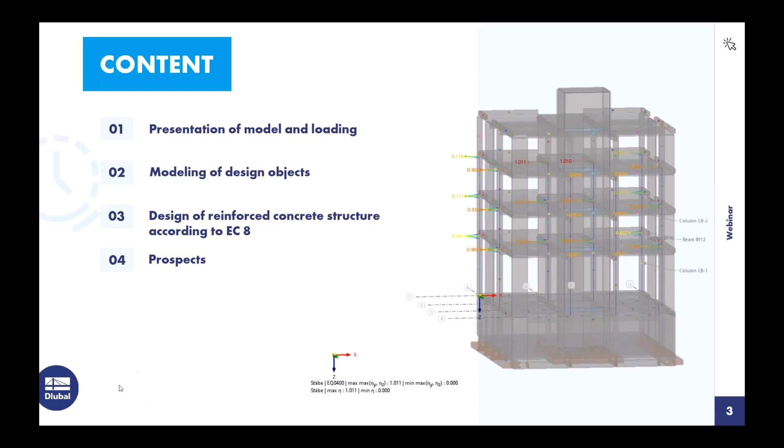We now go to the program. I open my model, I want to open this one. This is the building we will have a look at today. But before we do this, we open the base data.

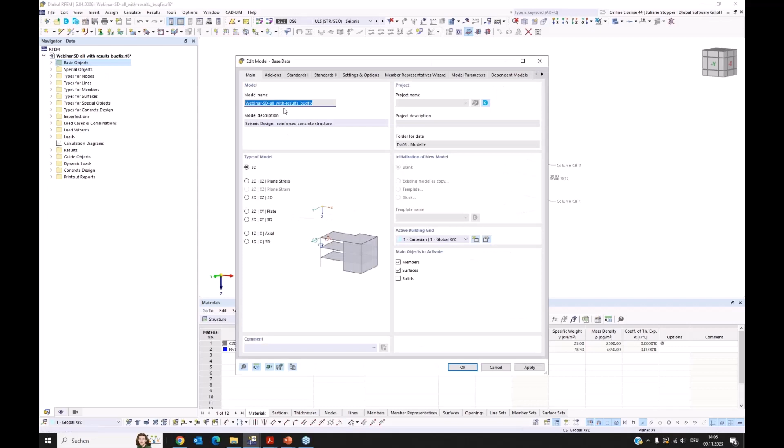And in the base data, you can see we have our register add-ons. In my model, I have the concrete design active, and for dynamic analysis I have the modal analysis and the response spectrum analysis active. As you know, in our finite element program, when you activate these add-ons, the needed input dialogues and program parts and output for these add-ons are integrated.

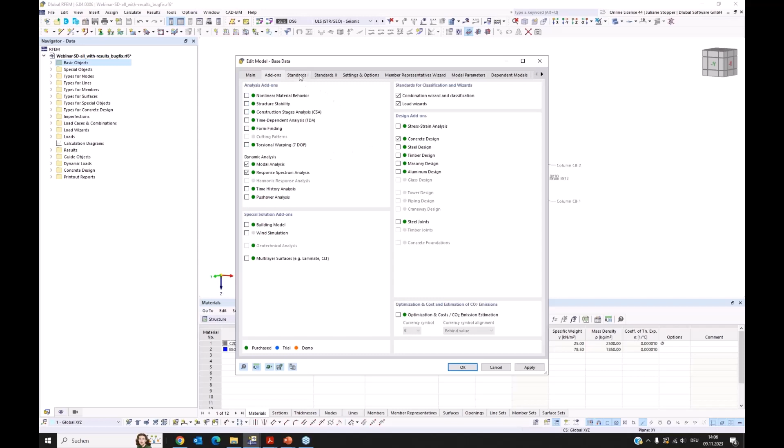So what we need to look at is the next register, the standards, because you have to tell the program according to which standard the design shall be done, and also for the dynamic analysis it is needed to be given. So today we will have the Eurocode as the standard we want to use, and I want to show we have here an overview about activated standards. If you select the concrete design here, you can see the standards activated in the concrete design, and you can see here that we have Eurocode 8 now integrated.

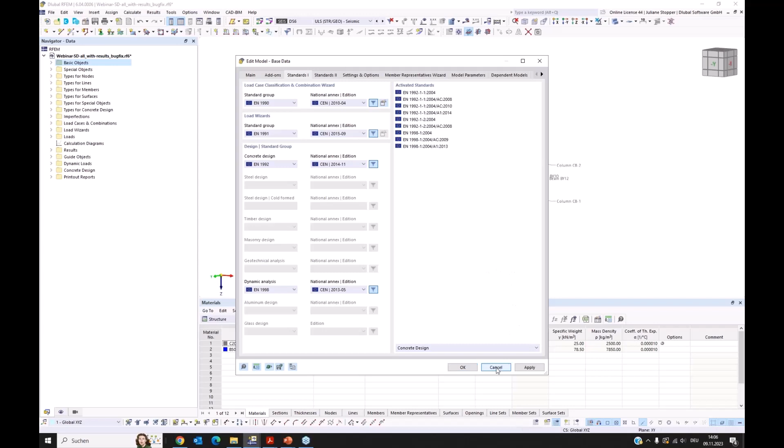Okay, this is enough, I think, for the base data. Nothing else that is new. Okay, then we can go back to the model and have a look at it a bit.

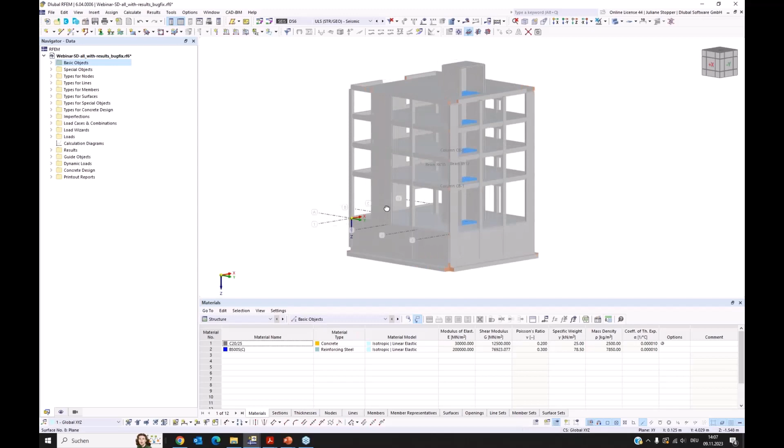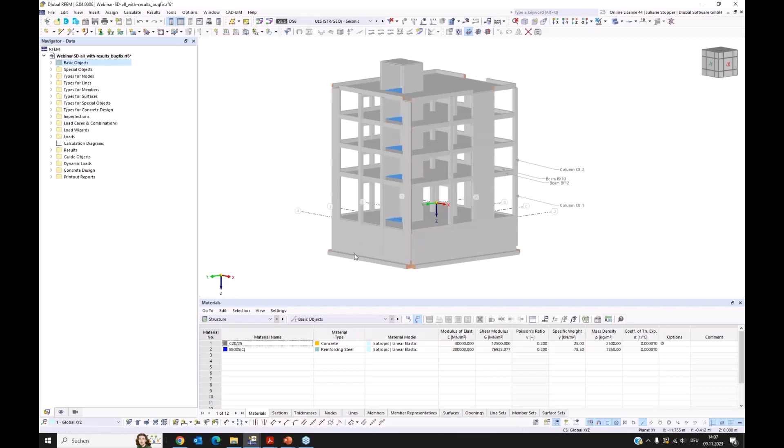So it's a reinforced concrete building that has 5 floors, and we have shear walls at every side, at least one. We also have this U-shaped concrete core here in the center of the building, and we have columns that go from the bottom of the building up to the top continuously, and they have the same cross section all over the height. And we have here beams placed between all vertical members.

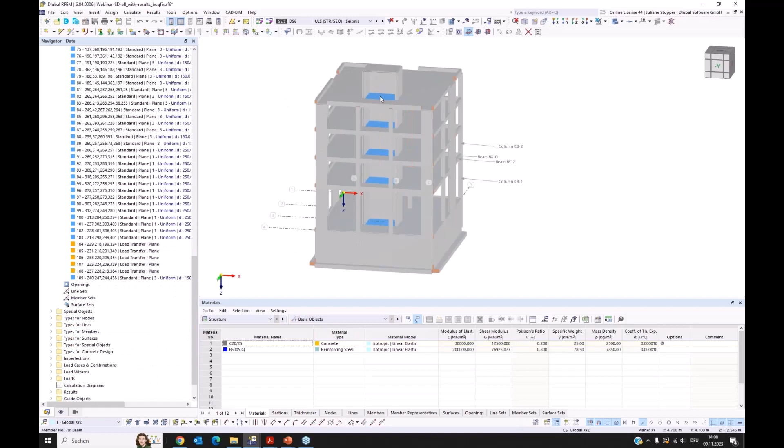Yeah, and you can see these blue surfaces I have in the building. They are just used to allow me, I forgot the name, that's why I go there, load transfer surfaces, for giving a simplified load for the staircase. Okay, I go back to the top and close this. Then we can, yeah, this is what I wanted to tell.

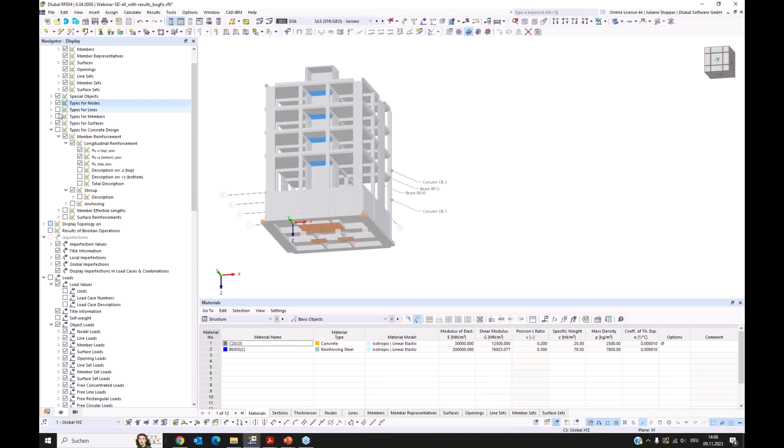Maybe I can show also the supports. I have nodal supports at the bottom and line supports. We can activate here, and there you can see that it's grounded on springs. Okay, then we can have a look at the loads.

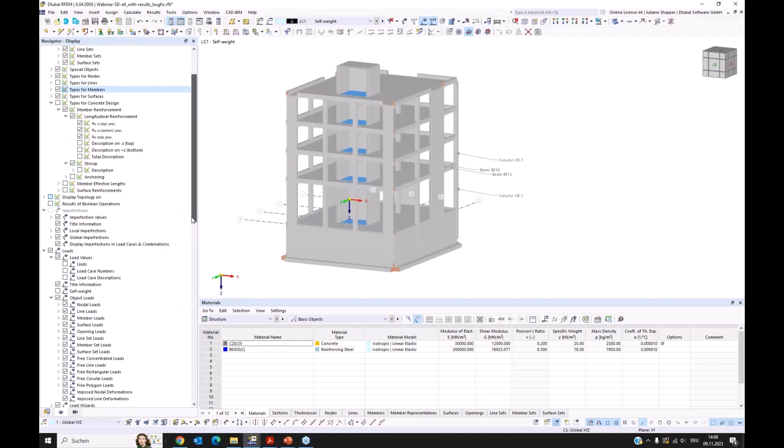We can activate them here, and I have in my model load case 1, which is for self-weight. And if you want to check what the program calculates from the cross sections and the materials weight, you can have a look at this and check these values, for example. Okay, I deactivate this. Then I have in my building a dead load placed, and also a live load.

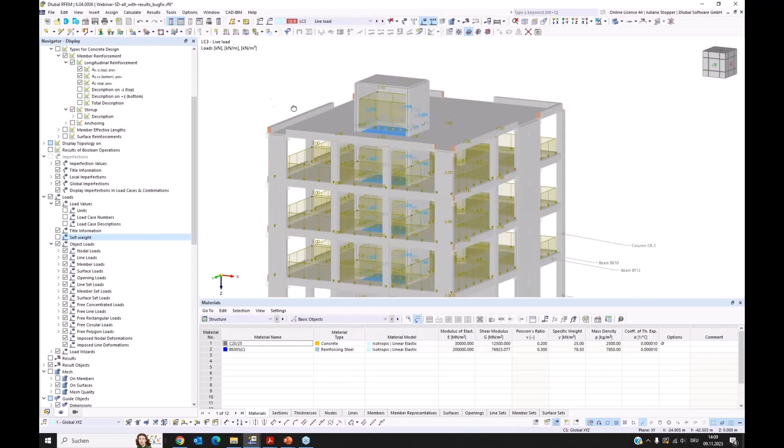Then I want to show the dynamic loads. Therefore, I go into the dialog where they are defined. We have here load cases and combinations, and I open this. Here we can see our load cases. So we had a look at the first 3 of them, and my 4th load case is a load case of the analysis type modal analysis. So it's selected modal analysis, and there we can check the modal analysis settings.

I will just show them. As I said, we have extra webinars where you can see in detail why which setting is needed or used. And we also provide trainings for this. So in my situation, I have 10 modes considered, and we consider the X and Y direction.

And I have in this register user-defined that I neglect masses from some structure parts that are placed in the support plane, let's say at the ground. Okay, then the modal analysis needs a load case or a load combination defined, from which it can import the masses. So I have this combination 8, from which the masses will be taken in my load case 4.

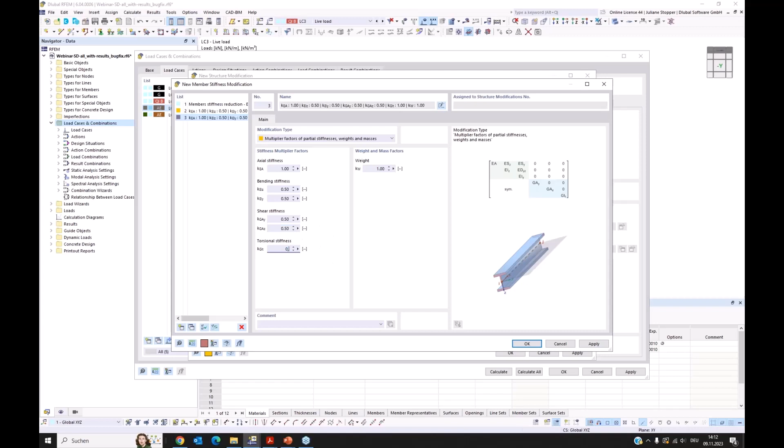Okay, and then you can assign it, and you have a stiffness modification here. This is what I now created. And you have to assign the members, of course. I only wanted to show this. I have this already prepared. I can remove this. We can have a look at this.

Here, like I said, you can define the stiffnesses and reduce them. I also renamed it, so it's easy to follow why I have this here. It's according to chapter 4.3.1 of Eurocode 8, clause 7. Okay, so this is how my modal analysis load case is defined.

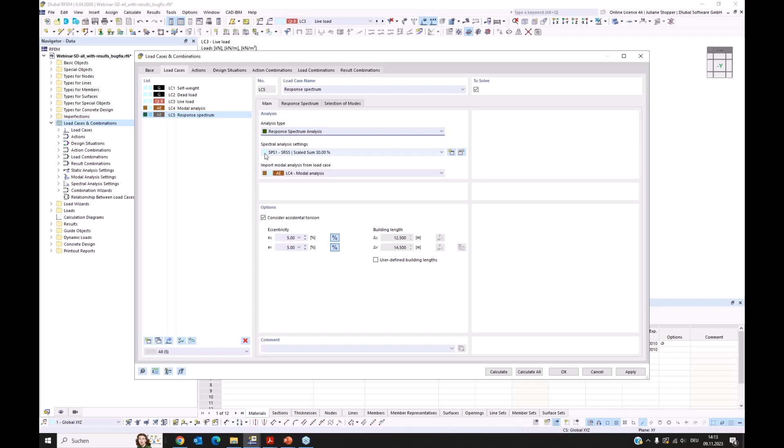Then I have my response spectrum. I have the analysis type response spectrum analysis set for this load case. And this load case needs a modal analysis load case, so I have my load case 4 assigned here. And I have spectral analysis settings for this case that I also only want to show. I have the SRSS combination rule, and I have the setting activated to save the results of all selected modes.

And the directions will be combined by the 30% rule. Yeah, these are the settings that I used in this model. And the accidental torsion is activated. Okay, then let's have a look at the response spectrum.

If you open this case the first time, it looks like this, and we have X and Y direction we want to consider, so you have to activate it, and then you can assign a spectrum. And I want to show you the spectrum I assigned. You have here the definition type, and it's also possible to have a user-defined spectrum or one generated from an accelerogram. But today we want to have the one according to standard.

Then you have to give the design parameters you have for your building, and we want to use spectrum type 1. We have ground type B, importance class 2, and this ground acceleration, and we have a behavior factor of 2. We will come back to this value later as it is relevant for our design. So we have in our response spectrum the behavior factor 2 assigned.

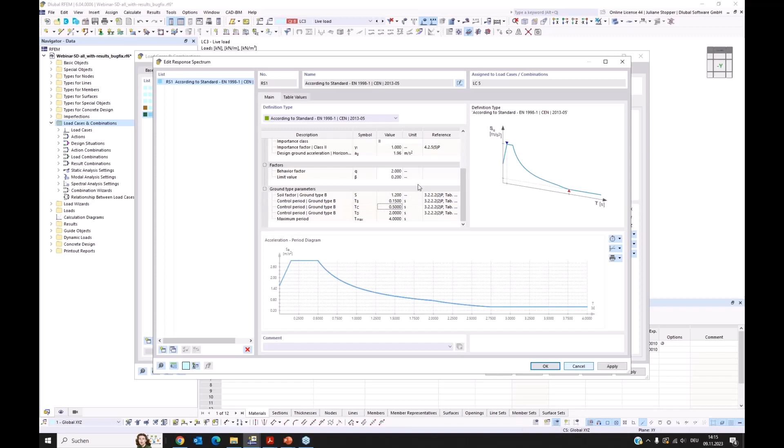And we can also see here these ground type parameters, and we have these periods, and this one, the TC, will also play a role later in the concrete design. Okay, then we can leave the spectrum. Yeah, that's what I wanted to show for these dynamic load cases. Then we can have a look at the further registers.

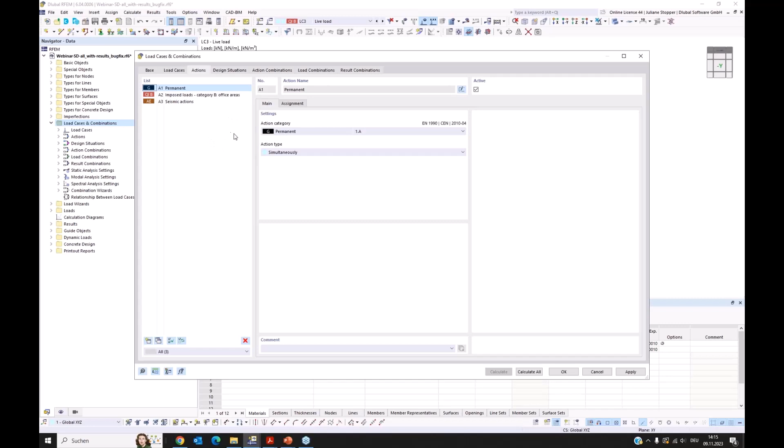These are the 3 action categories that are now modeled in this file, summarized. Then we can go to design situations. We have design situations 1, 2, and 4 that are known from the concrete design according to Eurocode 2. And we have this design situation 5. This is the design situation that was created for receiving a load combination where the mass for the modal analysis can be taken from. So we have here design situation type.

We can open this and we can see seismic mass combination type. Yeah, and if you want to see the rule of combination, you can click on this button. So this is the design situation type. This is the design situation that creates my load case for the modal analysis for the masses. For the concrete design, I need this design situation 6.

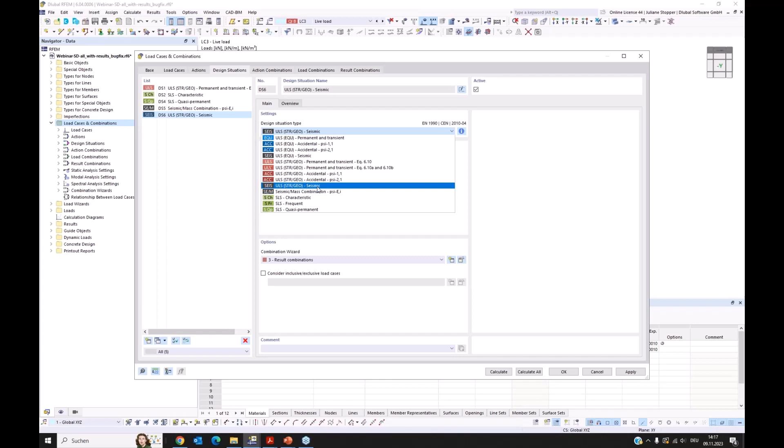We can have a look at the types again. There we have the seismic type, the ULS, STR, GEO seismic. This is the combination type according to Eurocode 8 for the seismic design according to Eurocode 8 for concrete members. Yeah, for other designs it could also be used, of course, but now we have here concrete design.

And we assign a combination wizard here. We have the response spectrum used, therefore we need here a result combination type. So this design situation generates result combinations for us. When we look at the previous design situations, they generate load combinations.

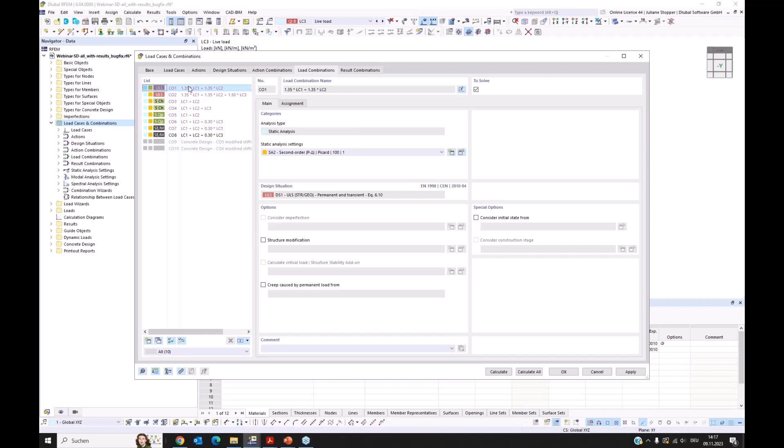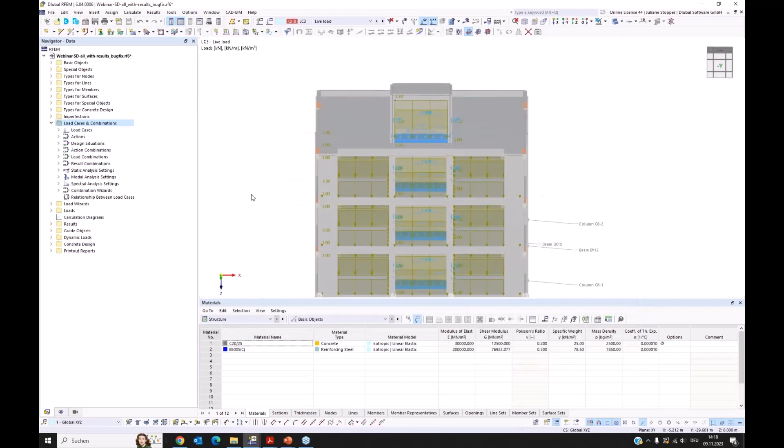Okay, then we can see our actions combined, and here are the load combinations that are generated from the first design situations, and we have here in the result combination the seismic result combination. Okay, that's all we need for the design from the loads. I will close this. I already have results in this model, so I don't save a setting or something. Okay, this is it from the model and from the loads.

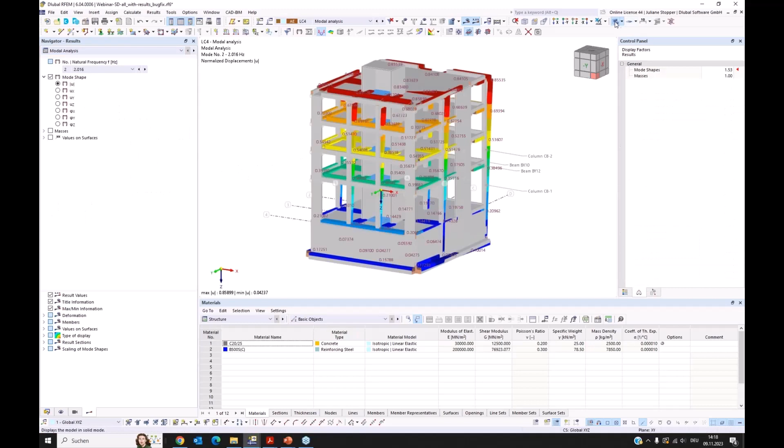I would like to shortly show you some results here. We have results when we go on the results button. We can shortly see the modal analysis. Yeah, here we can see the first mode shapes. We can see that the first shape is more in the Y direction and the second in this direction. No, this one is the Y direction, the first one was the X direction.

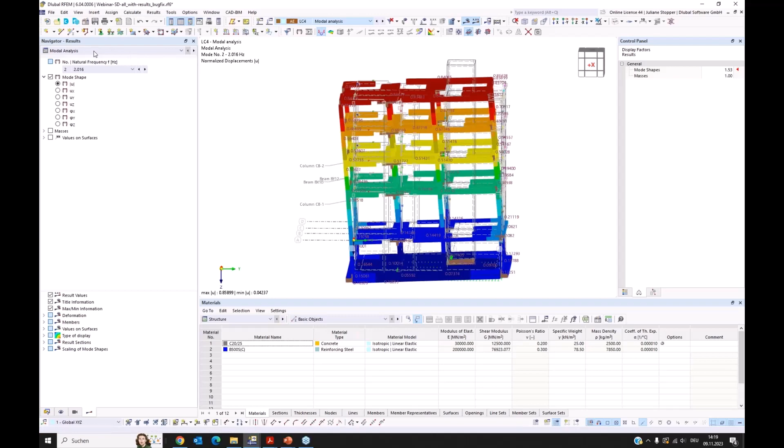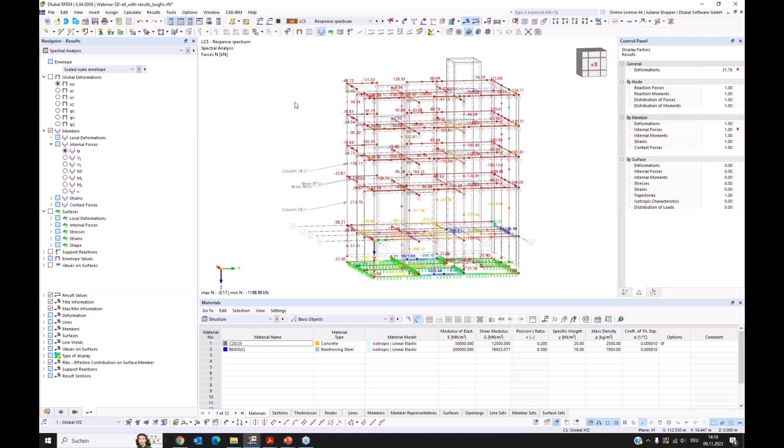So we have the modal analysis results, and we also have the response spectrum results. In the response spectrum, here spectral analysis, you can check the inner forces that come from the response spectrum in the members. These forces are then taken for the result combination and later go into the concrete design. Okay, so this is a short view on results. I will switch them off again and we go back to our navigator.

Now I want to come to the concrete design. My model already has reinforcement. I can also show this. Yeah, in the navigator display we have the option to display the reinforcement, and I will do this now just shortly for you.

Here we see. So this is all the members in my building that I have reinforced now. And if we look here, I can click on the column, for example, and do a right click, and you can also do a double click on the member. This works as well. And I want to show the reinforcement.

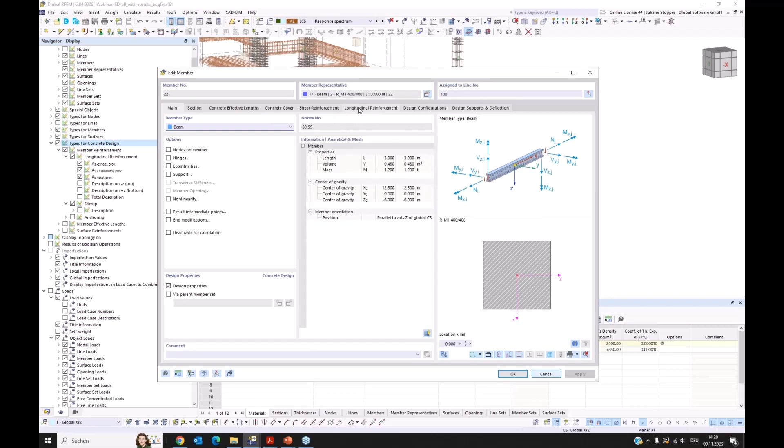In this column, I have uniformly surrounding longitudinal reinforcement. And I have here the shear reinforcement. And what we need for the seismic design is these cross ties. They are needed to have a more confined concrete core in order to receive a more ductile behavior of the members.

So you can activate it in the shear reinforcement, and you can modify it via clicking on the longitudinal bars. So if you have more longitudinal bars and you don't want cross ties between all of them, you can just click on the longitudinal bar and the cross tie will disappear or come back. Yeah, this is the thing about the cross ties.

Okay. Then, as we are already here, I want to show in a short excursus a feature we recently released. You always have the option in a member to see the reinforcement layout, and you can modify the way it is displayed here. For example, you can do a setting where you only see the longitudinal bars and no stirrups, or something. You can do as you like it or you need it.

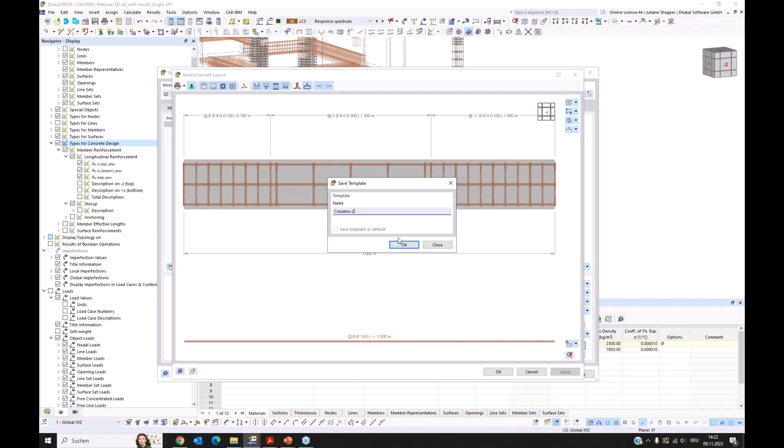And when you did this setting once for reinforcement layout for printing, you can save this now to a template. And this can then be used for more than one member. You can give the name, for example, I say columns, and maybe I say 2 because I already did this. Now I saved this setting. Now I have this template saved the way I like my reinforcement layout, and I will go back here.

And now if you say print graphics to printout report, I will deactivate this button. I don't want to print the model or the loads or the add-ons now. We have the multi-print activated, and I don't want these. I want to show you the graphic templates. These are templates that I have prepared before, and I now want to use my column reinforcement template. And you can use it for all members.

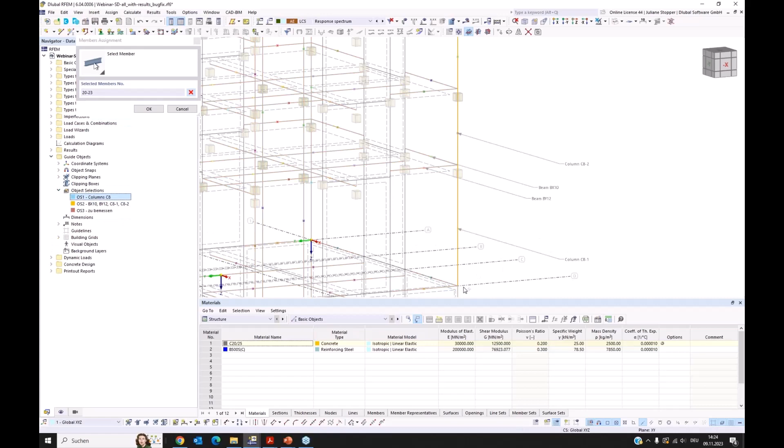Now 195 are detected, but I want to select them. You can use this mouse for picking the members you want to print with this layout. And I have an object selection prepared. I have now my columns C8. These are my columns in this position for the whole building I want to print with this reinforcement layout that I prepared before. I go back here, say okay, save and show, and then it is printed to the printout report, and after it is finished, it will show the result to us.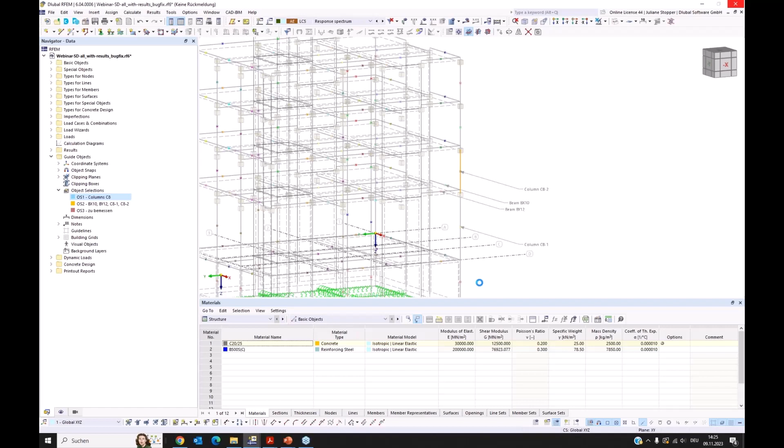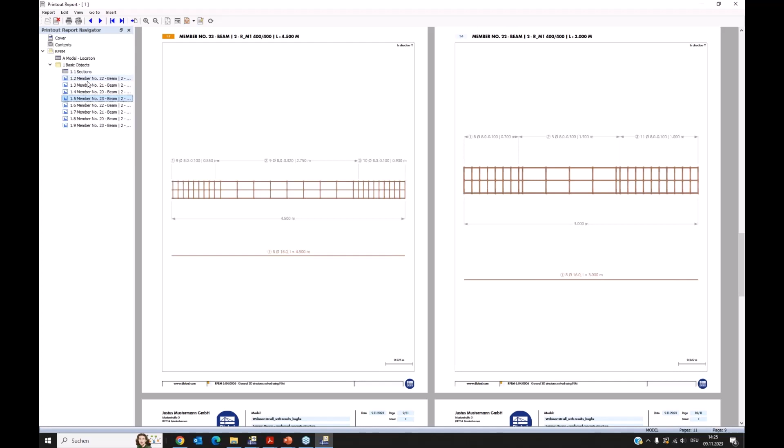Okay. I had a very short printout report prepared, so we can have a look at this. And now here you can see the members that are all printed with the same layout, and you have these graphics here. So with this template, you can easily print the reinforcement layout for a lot of members. Okay, enough for this. Let's go back to our seismic design.

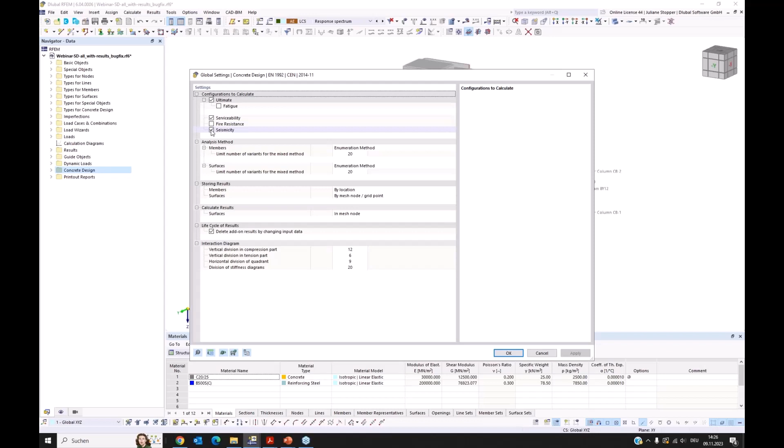I want to show the building again like this. Now I want to go to the further seismic settings. We have here the folder for concrete design, and if you do a right click on this, you can reach global settings for the concrete design. In this first field, you can select which configurations you want to have in your model. In my model, I have ultimate active, serviceability active, and seismicity active. So if this is activated, I have seismic configurations in my model, and at these we will have a look now.

Here you can see the seismic configurations, and I open them now. I collapse them. So here we have all the configurations you can do for controlling the seismic design. The first setting that we provide is the selection of the ductility class. We have the known low, medium and high ductility class. If you select the class, the provided input here changes.

So if we go to low ductility class, you can see that the configurations were reduced, because the low ductility class needs a design according to Eurocode 2 and has no further requirements for capacity design or ductility, but only a very small behavior factor is allowed. And it should be taken only for low seismic activity. Okay, so let's go back to medium ductility class so we can see more of our settings.

The second option is to define the structural system type. And if you have the case that you have different types in the different directions X and Y, you can also activate this check, and you can define the system type for both separately.

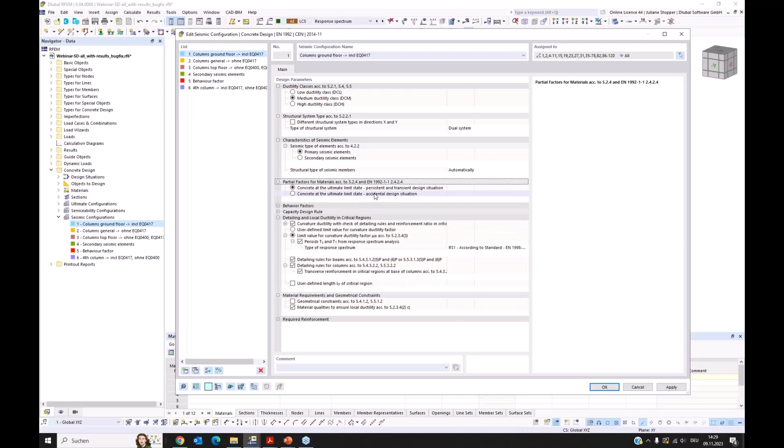Then you have the option to change the design situation to accidental design situation for the definition of the partial factors for materials. And then we can come, I collapse all again, to the behavior factors.

This is a check. If you activate this, you activate that you want your behavior factor to be checked. So the used behavior factor is checked whether it's below the upper limit for the factor. And you have the option to define manually the behavior factor that was used for receiving the loads you assign in your model.

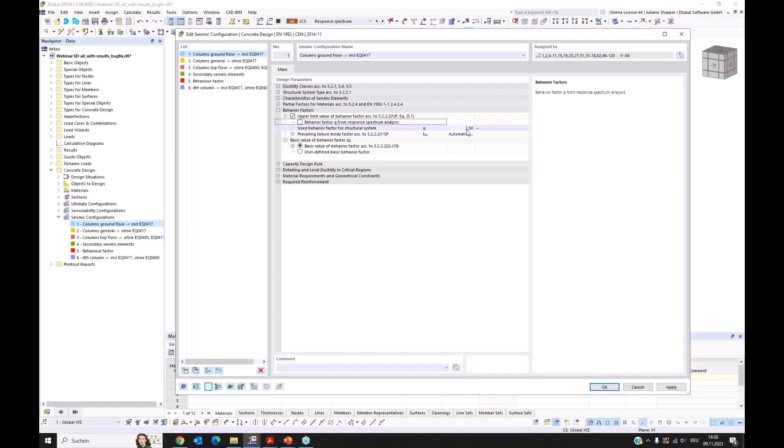Or, if you did the dynamic analysis in our program and you used the response spectrum, you have the option to take this value over from there. So I do it. We saw our response spectrum and we saw that we have the behavior factor, which is 1.5 for this situation or this model, and I want it to be taken in my check.

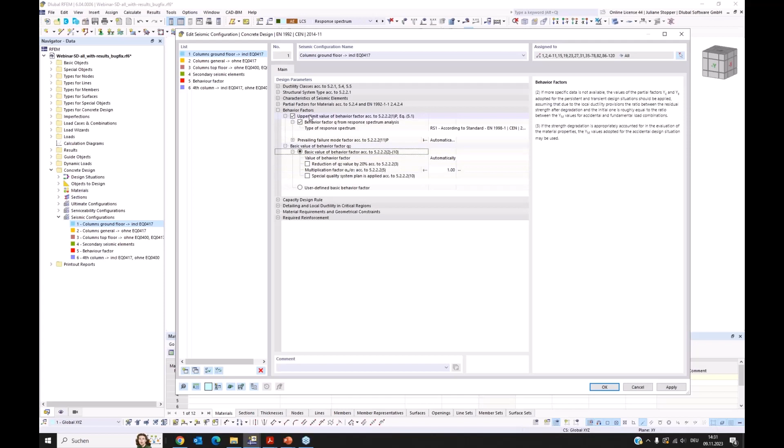Then you have here settings that you can do for the basic value of behavior factor that goes into the upper limit value. If you have this special quality system plan, for example, according to this clause of the standard or something, this has to be looked at with time.

The basic value of the behavior factor can be found automatically dependent on the system type and the ductility class you assigned, or you can also define it. You can set it directly here, select it by yourself, or you can also give a user-defined basic value.

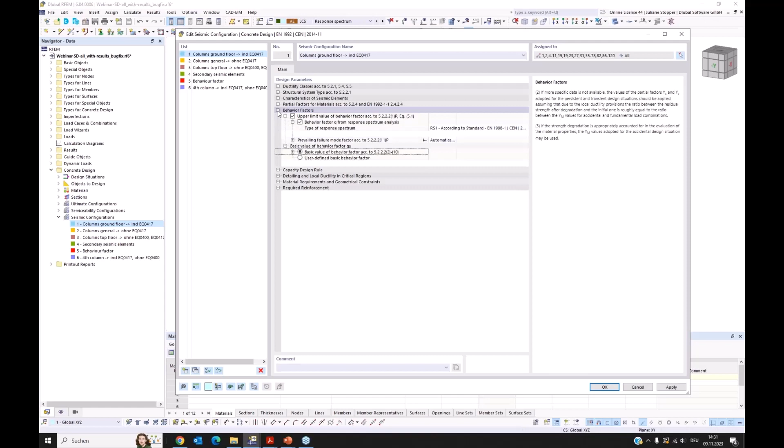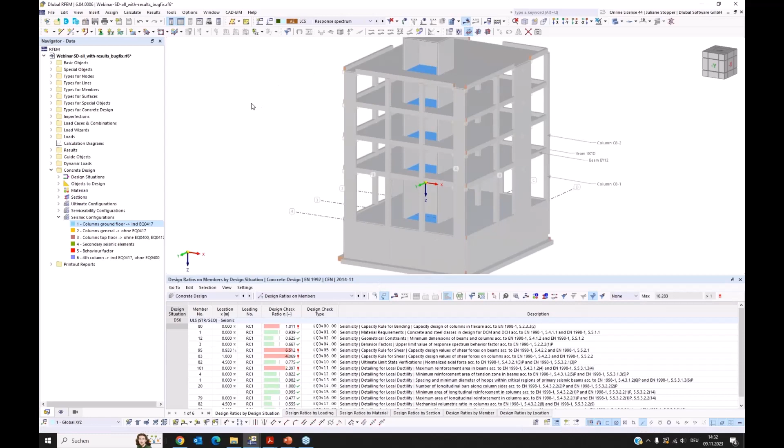We can have a look at this check shortly. As I said, I already have results in my model. If you look here at the concrete design, we see all the design checks that are done, and the check about the behavior factor is our check 0404. And we can have a look at this.

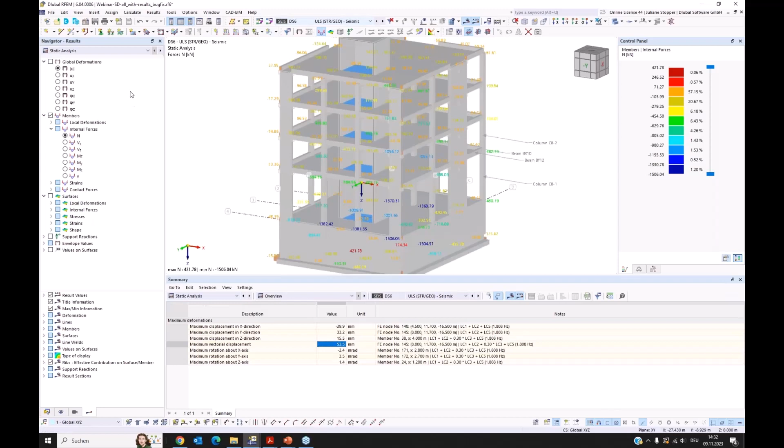If you double click on the design check type, no, I want to go back to concrete design. If you double click on the design check, you get into the design check details, and we shortly have a look at it for the behavior factor. And here you can very well follow what the program does.

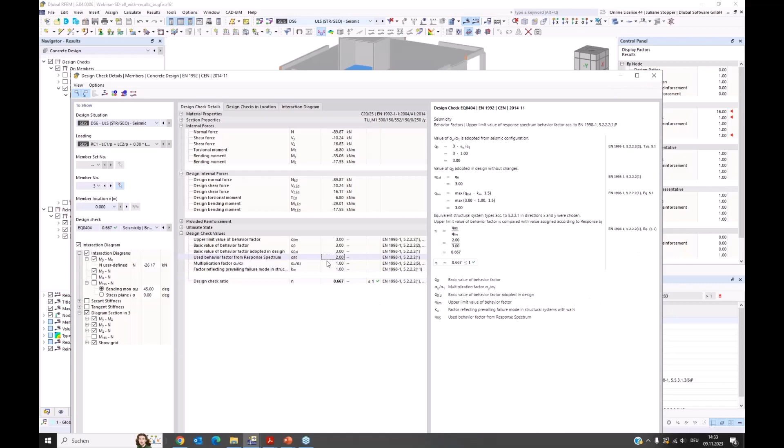So we have our basic behavior factor and the factors that you defined in advance, and the limit value is found. Then it is compared with the used behavior factor for the calculation of the loads, and we see that it's taken from the response spectrum, and we have the 2 here. So this works well, that we take over from the dynamic loads these parameters that we need for the design as well.

Okay, I can also reach the configurations from the table here. We have the input data here, and here also, as you can see, our configurations and the seismic configurations. So I can also open them from here. And we are back in the configurations. I can collapse them, and now we come to the capacity design rule.

With the capacity design rule, you can control the failure mechanism of the structure, and for this 2 main checks are required. And for this, I will go to the presentation shortly.

What we need is to fulfill equation 4.29 of Eurocode 8, which is about the ratio between the sums of the design values of the moment resistances of beams, here with B, and columns. This rule is the strong column, weak beam concept. So we require that the moment resistances of the columns are stronger than the moment resistances of the beams at a joint. So we have to check this equation for all joints, for all nodes.

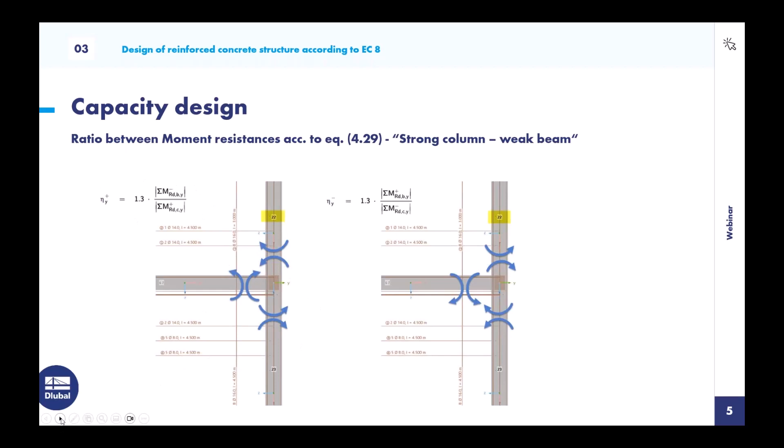This is the one check, and the second check is the capacity design shear check. In the situation when you reach moments that equal the moment resistances, you can calculate the related shear force in the member. And for beams, you also have to assign the quasi-permanent load. And this shear situation you have to check, because you don't want an earlier failure because of shear, which is also brittle.

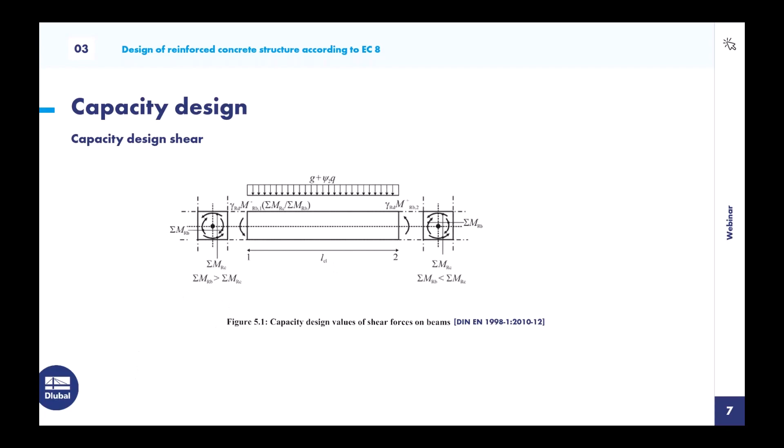So you have to check this situation when you have the moment resistances reached at the member ends and the quasi-permanent load. This shear force has to be checked as well. So let's go to the configurations again.

In the first checkbox, we activate the strong column weak beam rule. We also can see here the equation 4.29. And in the second check, we activate the shear force, shear check for capacity. Then you also have the option to define overstrength factors for beams and columns. And we have here the detailing rules and the ductility checks.

We have here at the top the curvature ductility checks, which are provided indirectly via the requirements for detailing rules. So by fulfilling these detailing rules, the curvature ductility check can be done. And we have one checkbox for the beams and one for the columns. And for these checks, also the limit value for the curvature ductility factor is needed.

And here again, you have the option to take the values Tc and T1 from the dynamic load, from the response spectrum that you assigned. Again, you can assign it here. If you don't want this, you can assign these values manually, or even assign a limit value for the curvature ductility factor manually. Okay, but we have this situation. I have the periods taken over from there.

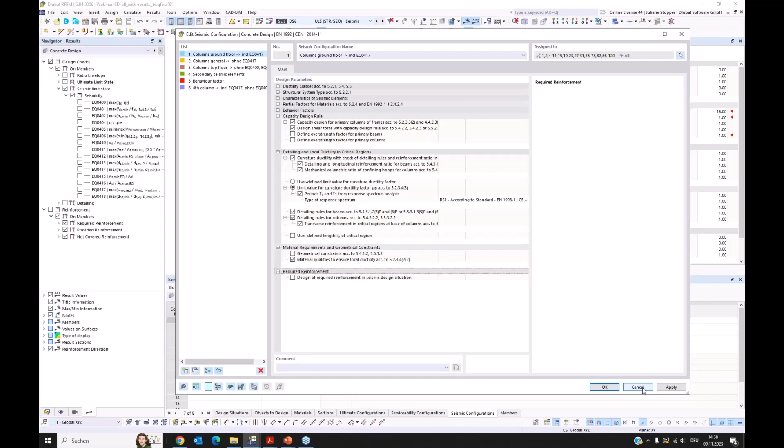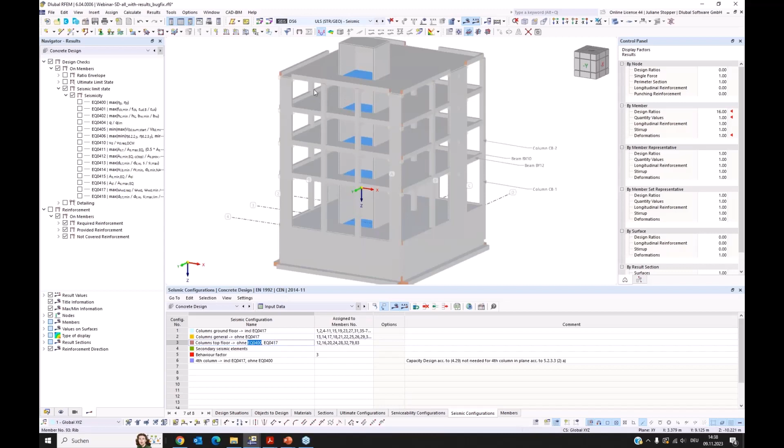Now we will have a look at some checks. As you saw, we provide the option that you can select quite detailed which checks shall be done or shall not be done, and this allows you to make specific configurations for your situation. For example, I have for the top floor another configuration which doesn't do the strong column weak beam check, as I don't need it for this floor. And you can also have a setting for the secondary members, and you can modify it quite functionally for your situation. Okay, and now we have a look at results.

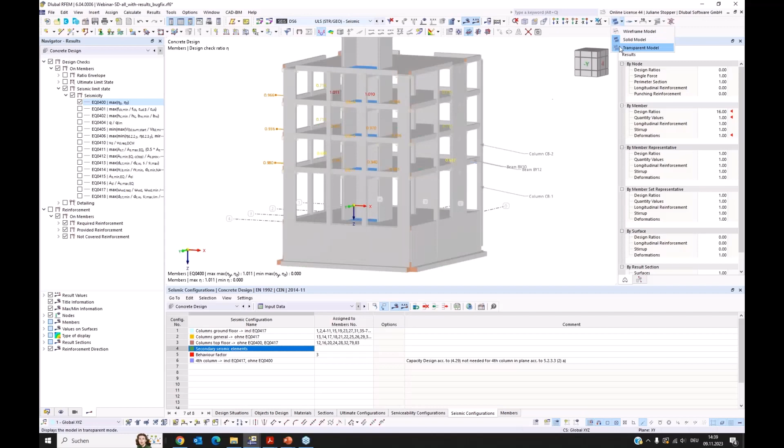I will at first activate this check. It's the EQ 400, and this is the capacity rule, the strong column weak beam check. If we go here to wireframe model, or maybe the transparent model. No, let's go to wireframe. You can see that in all these nodes where columns and beams come together, this check is done. And I want to now have a look at this with you in detail.

Therefore, I use these members that I have given names here, as it is easier to work with not all of them at the same time. I have prepared guide objects here. I have an object selection which contains these members, and I can click on here and then set my visibility so that only these are displayed.

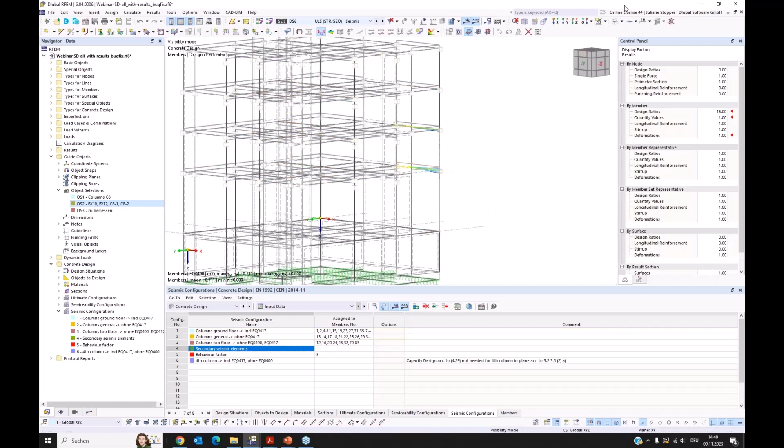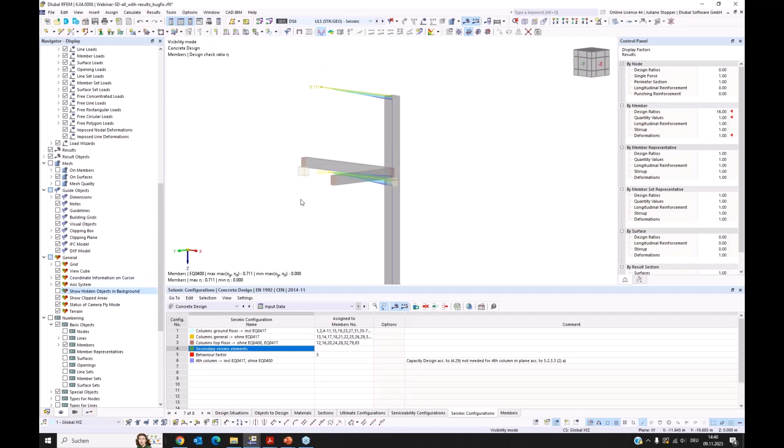And if I go on this view, I see my selected members, and I have a kind of shadow display for the rest, and I can also switch this off. Sometimes it's good as an orientation, but now I don't want to see this. I want to have a look at these members. Okay, we have the results graphically, and we have them also here in the table.

I can go on design ratios on members, and here, if I select them also, I have my EQ 400, the strong column weak beam rule. And we come to the design check details. Here you can see that the program does the check. The strong column weak beam rules we check in the column members. So I can open numbers for them.

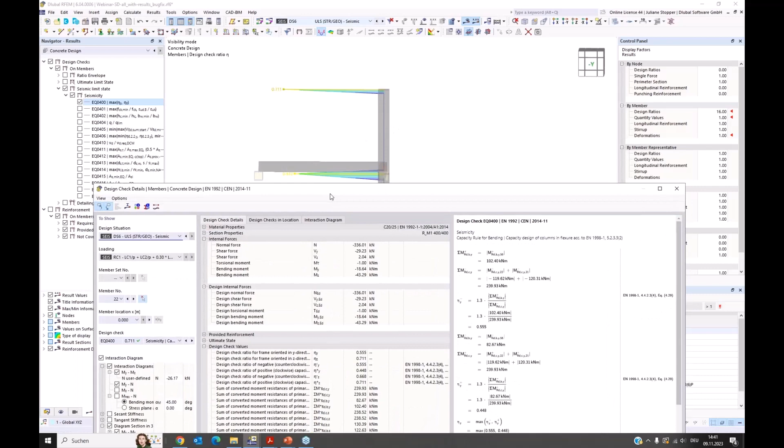I have here my column number 22, and in this member at the end and at the beginning, the strong column weak beam rule is checked. So if we look here, now I'm at member location 3. I want to also see the local axis. So position 3 in this member is this node here, and I want to have a look at this. So I again go to location 3.

And as we can see, we have the Y direction. So all these indices are dependent on the column. So I have the moment resistances around the y-axis, around local y-axis of the column, that are checked now at first.

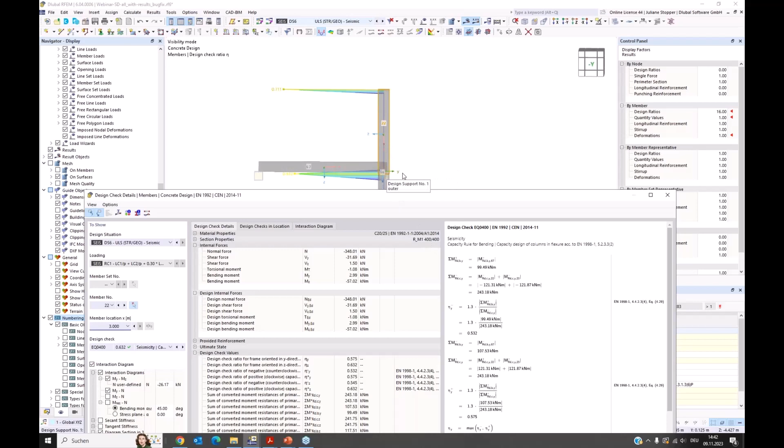And for this, around this node, around the y-axis, in this direction, the beam 67 is relevant. So the program found beam 67 and took its moment resistance. And then the columns from top side and bottom side of that node are considered here as well.

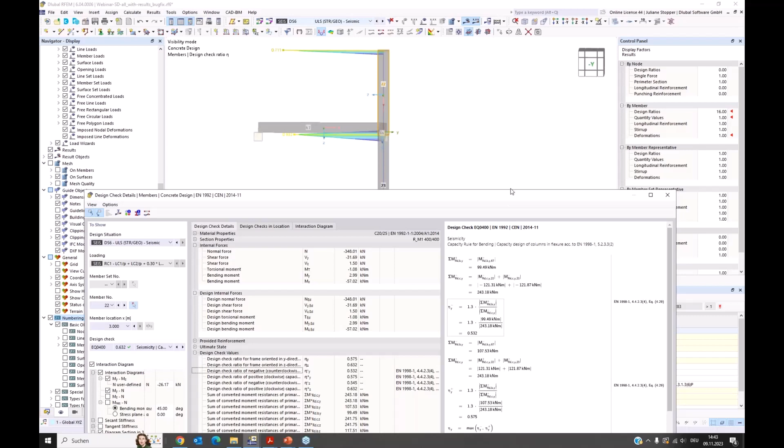And we can see, if we click the values off and just look at the formulas, we do the check in both rotation directions. Let's say we have here the minus around y and the positive around y, and the same for the z direction. And for the z direction, the other member, member 66, is considered. Now here we don't see it, it's in the direction of view.

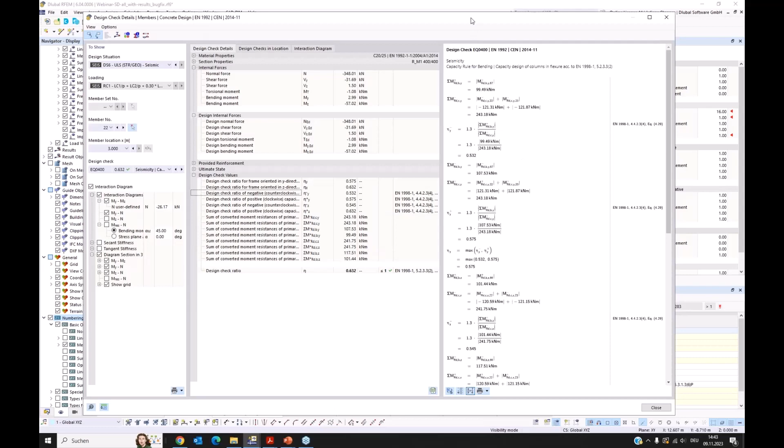Okay, so let's go back to values. I want to now with you find the value for the moment resistance of the column. Therefore, here in the column, we are in this member number 22, we can open this result diagram and we can check the normal force in this column.

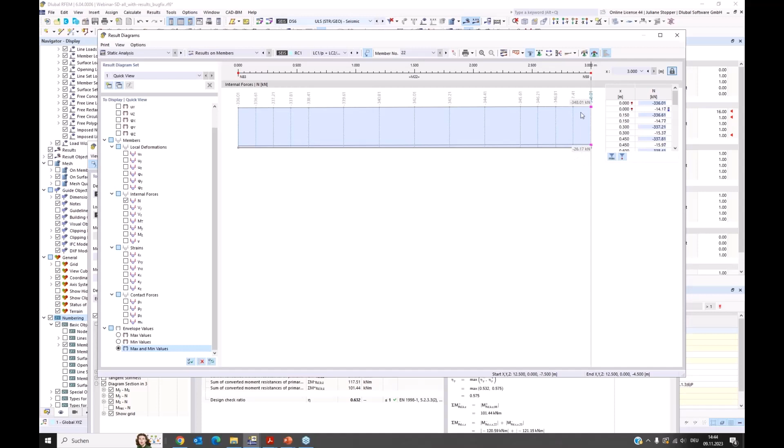And we have a result combination, so we have to check a range of normal forces that can appear. Our normal force lies between minus 26, let's say, and minus 348. And with this information, we can go to our interaction diagram that you can activate here, and then you have this register open here.

And if we look at this, we see that with a higher, let's say, negative value of normal force, we have a higher moment in the column. And for our check now, the worst case is the lower value of moment resistance in the column. So that's why I have to consider the minus 26 normal force, as it's the worst case and the safe side.

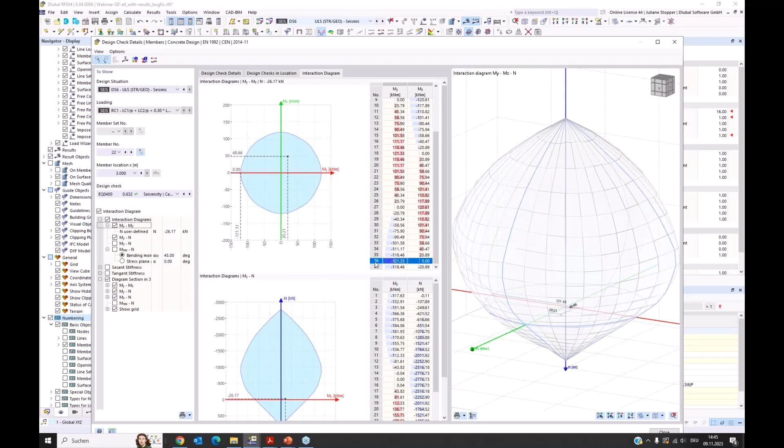And then I can look in this diagram and take my M around y for the situation that Mz is 0, and we see we have 121.3, and in minus direction the same, as I have longitudinal reinforcement on both sides the same. If I would have different reinforcements here, I would have different moments.

So I can come back and we see, yes, our program found the right values for member 22 around Y for the resistance, and here in the other direction. Yeah, and you can do this if you need - you can follow where these values come from.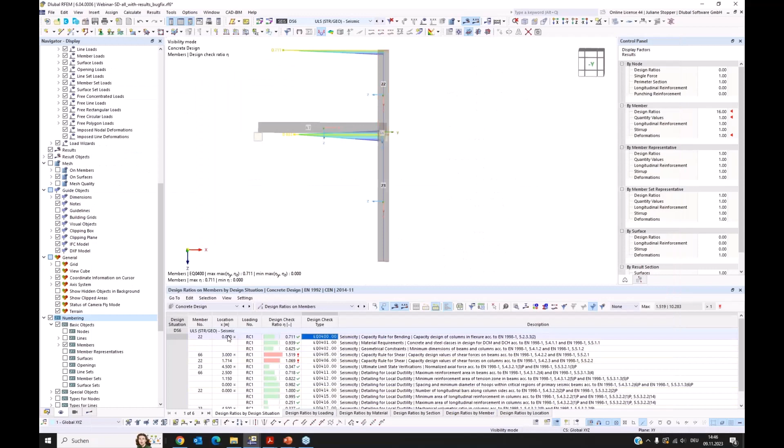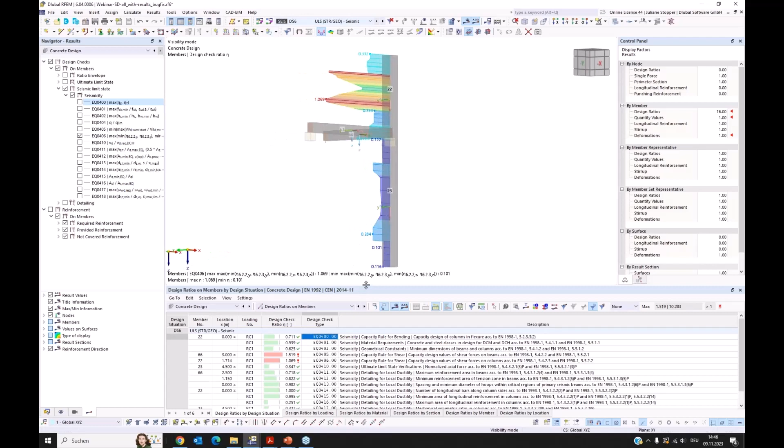Okay, that's it for the check of the strong column weak beam, or the EQ400. Then, as we spoke about, here you can see that the 66 is relevant for Z direction. Then we can check the shear force from the shear check for capacity design.

It's for columns in our program, the 0406 design check, but you can also read it here in the description. Here I have to look at some values that are higher than 1. We will have a look at this now.

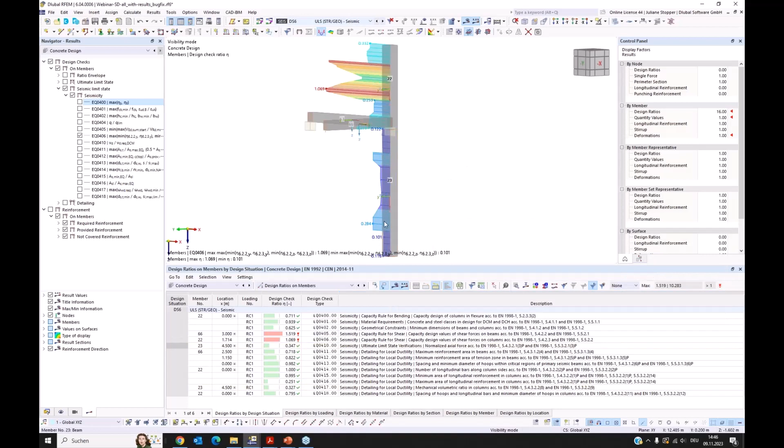So I will open this member 23 and we can have a look at check 406. Yeah, here it comes. And yes, as shortly shown on the slide, here now the moment resistances from member start and member end are taken, divided by the length of the column, and in this way the shear force in this location is calculated. And this again for the different rotation directions, let's say moment directions, orientations.

Yeah, and then we have a shear force, and then with the reinforcement, the shear reinforcement, the normal shear check is then done. It's compared with the shear resistance. This is it for the column.

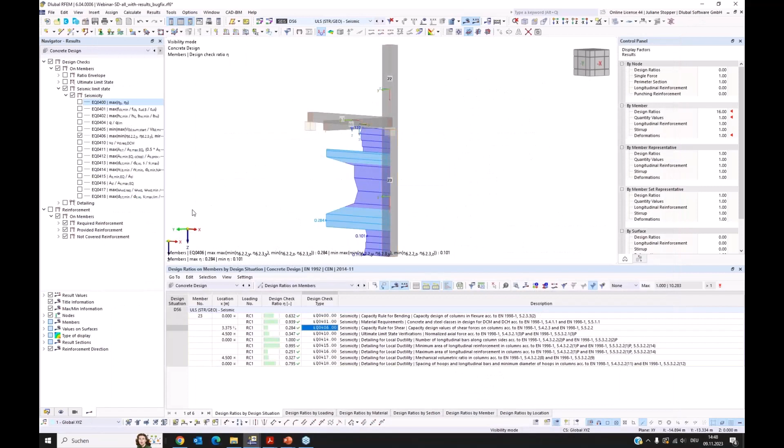Maybe we can have a look - we have more checks I will show later, but we can look at the curvature ductility check for this column. It's hidden in this check, it's the 417. I double-clicked on it shortly. You can find it there.

Yeah, here it's a check about the reinforcement, the mechanical volumetric ratio in columns. It's for making sure the curvature ductility in the column in the critical region. And this is the check where also the values from the response spectrum are needed and considered. Yeah, but you can follow this in detail in the program.

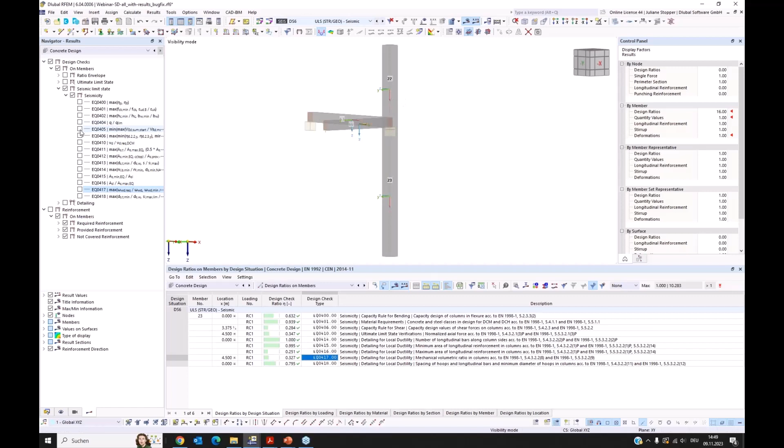Okay, then we can also have a look at the beam checks. As I said, the moments of this node are checked in the column, so we have checked this. Then we can also check the beam. Yeah, we can go into this one.

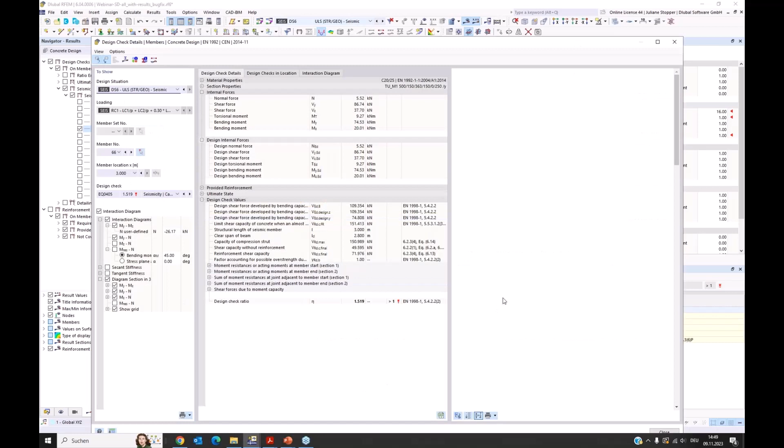Here also some. Yeah, and what I want to show is that we have again the moment resistances, this shear force, and we have added the quasi-permanent load. And again, like this, the shear force is calculated and then it's compared with the shear resistance provided by the reinforcement.

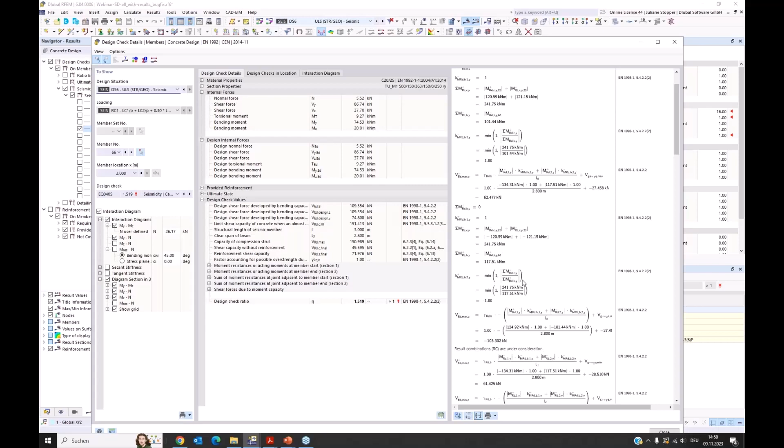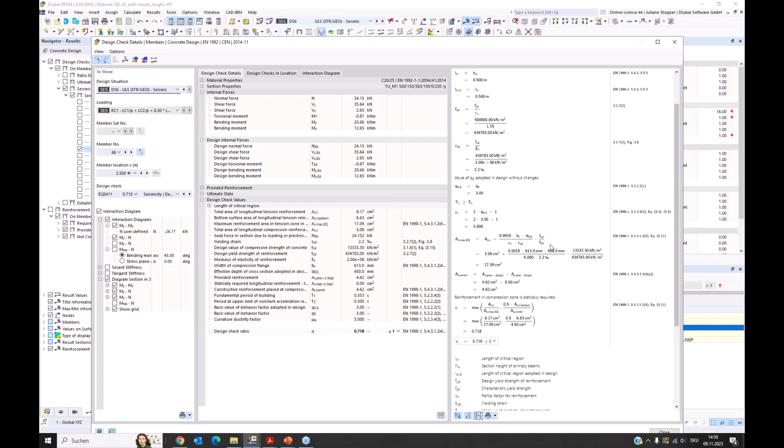This for the beam, and for the beam we also have the curvature ductility provision, let's say. We have the requirements according to the maximum reinforcement area in beams. I double-clicked on it shortly. There it is required that on the compression side you at least have placed 50% of the reinforcement of the tension side. You can follow the information here later in detail.

So this is it for the beam, I think, and we also have here these about the distances of stirrups. That's it in detail.

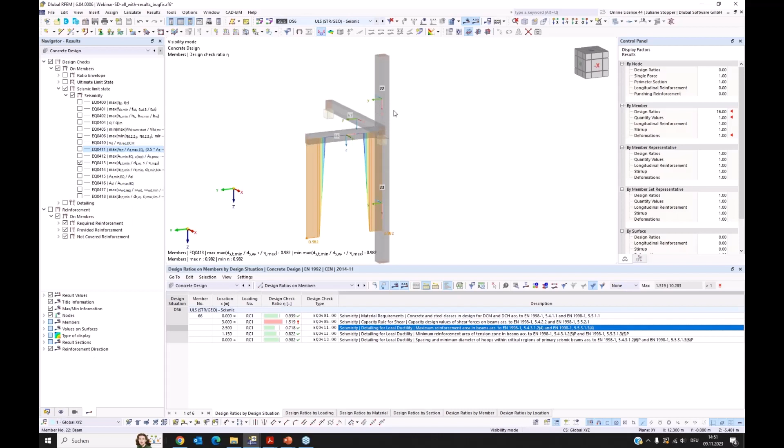I want to again show the whole structure. Therefore, at first we deactivate the local axis systems and the numbering, as it is too much when we see the full building, and we can go back, cancel the visibility mode and see the whole structure, and also uncheck this. And then we can check this for the whole system.

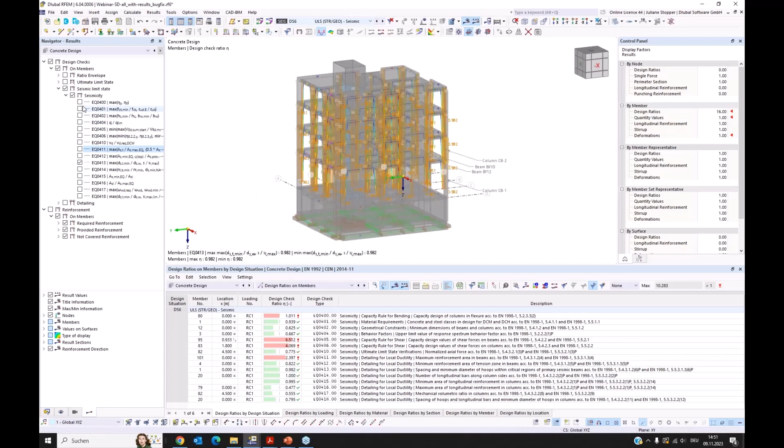If you want to modify the way of the display of the results, you can also change the ratios here. So here we have the strong column weak beam rule checked for the nodes. Then we have here the material checked for all members, and we have the geometric rules checked. I checked the behavior factor just for one, but it's valid for all the building. I only did the calculation just once.

These are the shear results we looked at, and here we have a check according to the normal force in the columns, compared with the limit value. And this is the curvature ductility check for beams, and this is the minimum reinforcement check for beams.

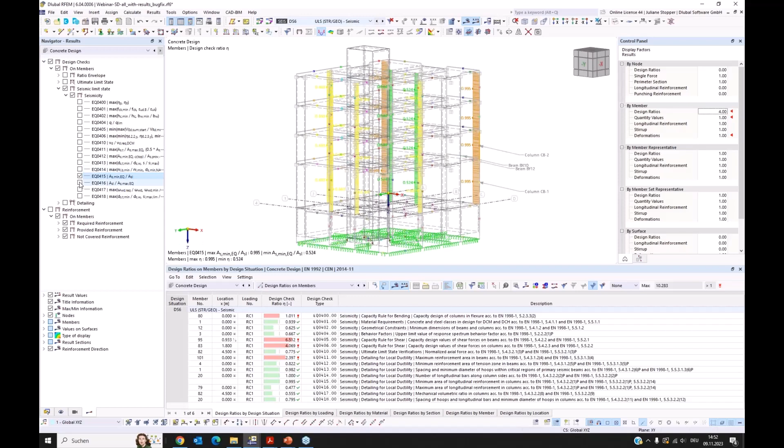And the distances of the stirrups we saw. This is the number of longitudinal bars that are required according to Eurocode 8 in columns. And then we have some more column checks like minimum reinforcement, maximum reinforcement, and also the spacing of stirrups.

Okay, this is what I wanted to show regarding the seismic design for concrete members as an introduction.

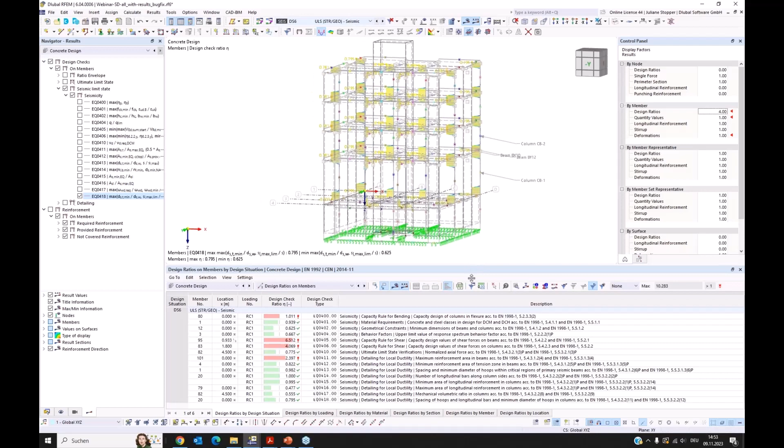This shall be it for this webinar. As I said, as a very short prospect, I would like to tell that regarding seismic design, we are currently working on the required reinforcement. We have several of these checks already considered in the calculation of the required reinforcement. We are currently working on consideration of the capacity design checks and the required reinforcement. This will be one of the features that we will provide to you next, and we also work on the performance improvement for our seismic design. The next step, the next project, will be the deep beams and shear walls, the design for it. This, as a short prospect for the seismic design.